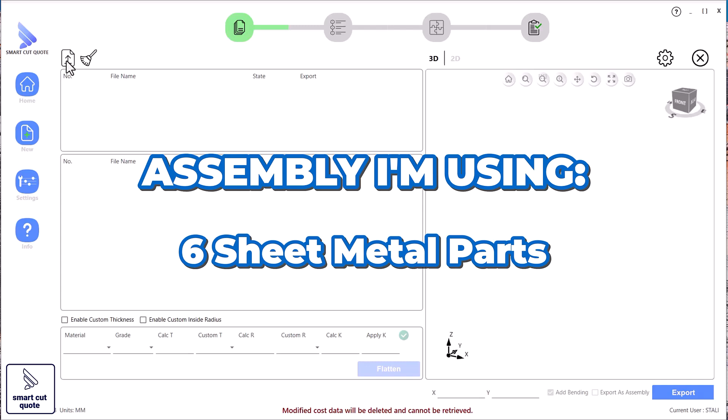Hi everyone. In this video, I'm going to show you how to import a 3D step assembly and turn it into a complete quotation. The assembly I'm using has about 6 sheet metal parts. Some parts have bends while others are completely flat. It also contains screws, nuts and other hardware that we do not manufacture.

Let's get started. Import the step assembly. First, I'll create a new quotation and import the step file. Your customer may send you a single 3D part or a complete assembly like this one. Once it is imported, we can see the complete assembly and all the individual parts inside it. This is much easier than asking the customer to send a separate DXF file for every part.

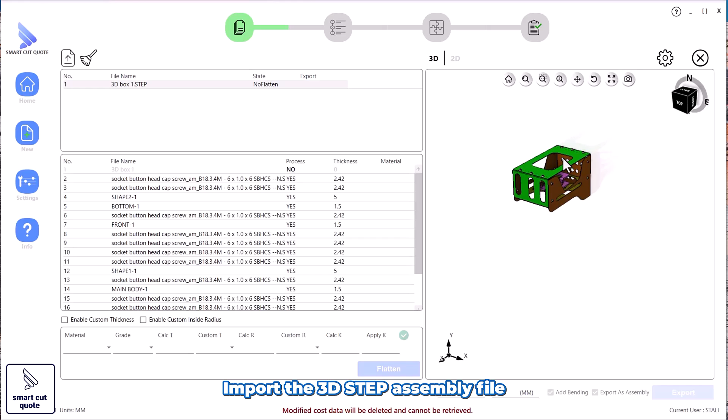Separate the parts. Next, I'll split the assembly into individual parts. You can now see all the components separately. Some of these parts need to be manufactured, but others, such as the screws and nuts, are standard hardware. Remove the hardware. I don't want to include the screws and nuts in the cutting cost, so I'll suppress or delete them. Now, we are left with only the parts that need to be manufactured.

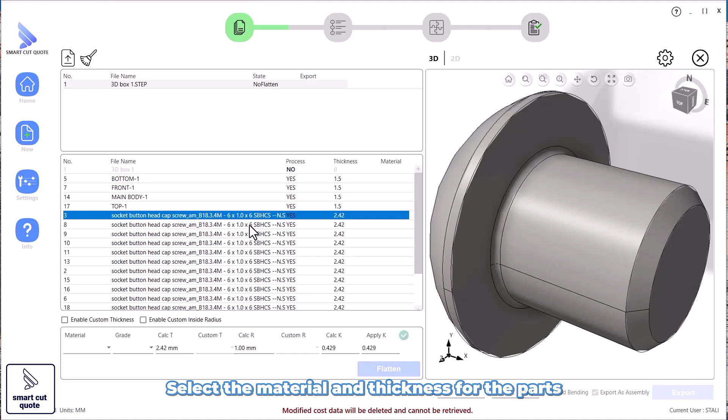Apply the material and thickness. Next, I'll select the material and thickness. For example, the parts could be made from mild steel, stainless steel, or aluminium. If all the parts use the same material and thickness, I can apply them together. If some parts are different, I can update them separately.

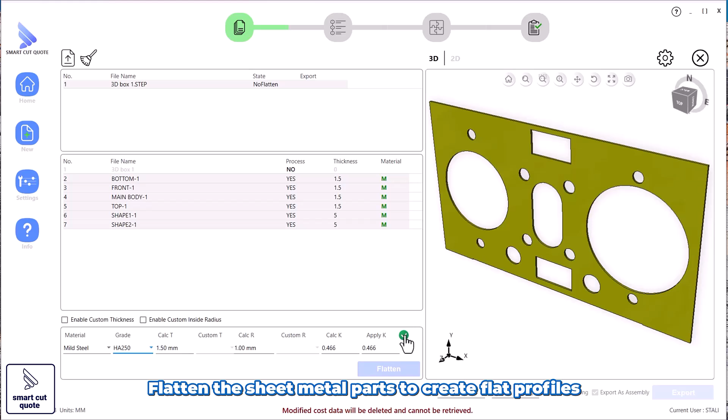Flatten the parts. Now I'll flatten the sheet metal parts. The software creates the flat profiles needed for cutting. Some parts in this assembly have bends while others are already flat. Both types can be included in the same job. I'll quickly check the flat profiles to make sure everything looks correct.

Export the DXF files. Once the parts are ready, I can export all the flat DXF files in one go. I don't need to open every part and save each DXF separately. These DXF files can now be used for laser cutting, plasma cutting, water jet cutting, or other manufacturing processes.

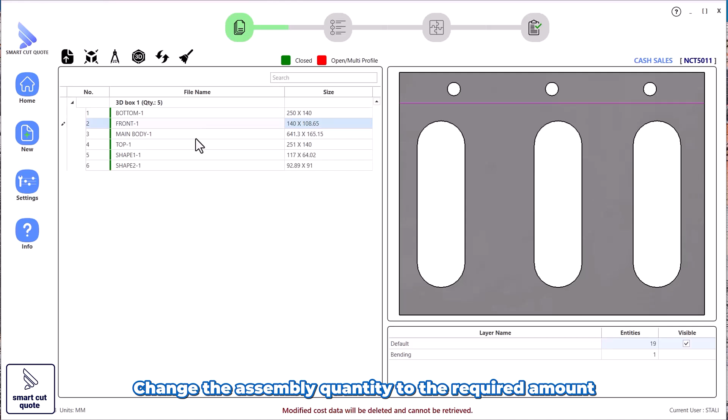Change the quantity. For this example, let's say the customer wants 5 complete assemblies. I'll change the assembly quantity to 5. The software will automatically update the quantity of every part needed to manufacture those 5 assemblies.

Calculate the bending cost. Smart Cut Quote also calculates the bending cost for each part. The cost can be based on the number of bends, the size of the part, the material and the thickness. Parts without bends will not have a bending cost added. This saves time and gives us a more consistent manufacturing cost.

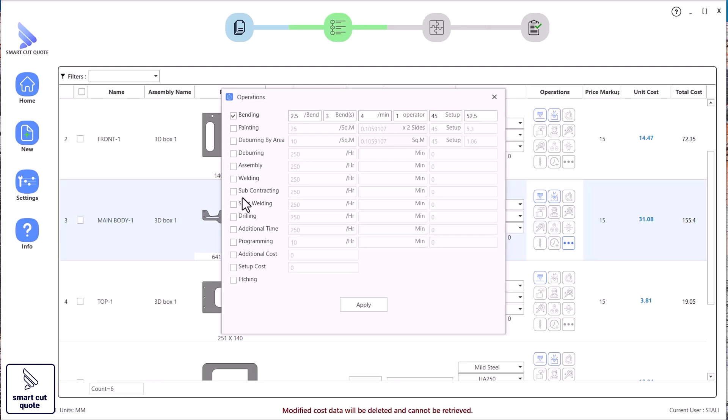Add other operations. If needed, I can also add other operations such as welding, powder coating, painting, deburring, packing or delivery. This allows me to include the complete manufacturing cost in the quotation.

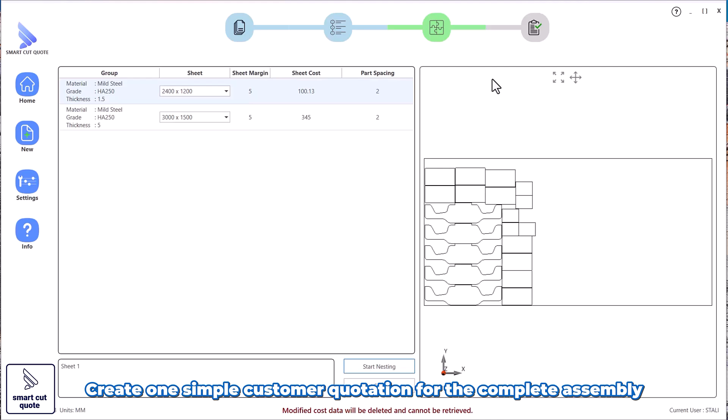Create one simple quotation. Finally, I'll create the customer quotation. The customer does not need to see all 6 parts separately. Instead, the quotation can show one complete assembly, the required quantity, and the price to manufacture each assembly. This keeps the quotation simple and easy for the customer to understand.

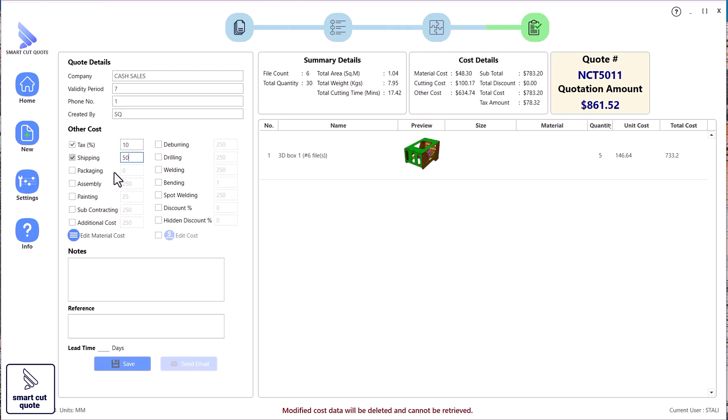Why is this useful? Customers do not always have separate DXF files for every part. Sometimes all they have is one STEP assembly. With this process, you can work directly from that assembly. You can remove unwanted hardware, flatten the sheet metal parts, export the DXF files, and calculate the cutting and bending costs. Most importantly, you can send the quotation to your customer much faster. The faster you respond, the better your chance of winning the job.

That's it. We started with one STEP assembly and finished with the flat DXF files and a complete customer quotation.